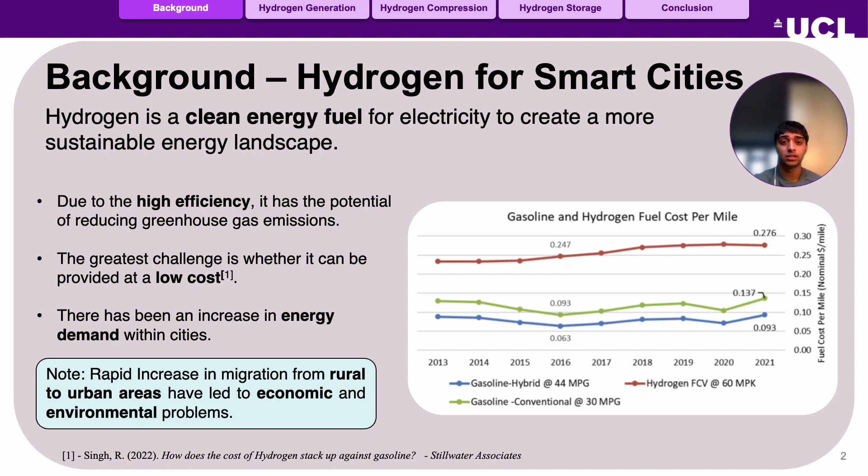When applied to highway vehicles, hydrogen can lead to a substantial reduction in emissions. Studies show that these vehicles could achieve an impressive 50 to 90% reduction compared to today's gasoline vehicles. For hydrogen to play a pivotal role in transportation and electricity creation, it must be economically competitive compared to other fuel sources. Currently, this translates to a benchmark of being priced at least $4 per gallon of gasoline.

Our presentation delves deep into hydrogen generation, compression, and high-density storage, shedding light on the pivotal factors that drive the development and integration of hydrogen as a viable energy solution. Hydrogen, with its various production methods, poses unique challenges such as those encountered in steam methane reforming. Following production, the next critical step involves compression for efficient storage and transportation. It is through the compression process that hydrogen becomes economically feasible for transportation and storage.

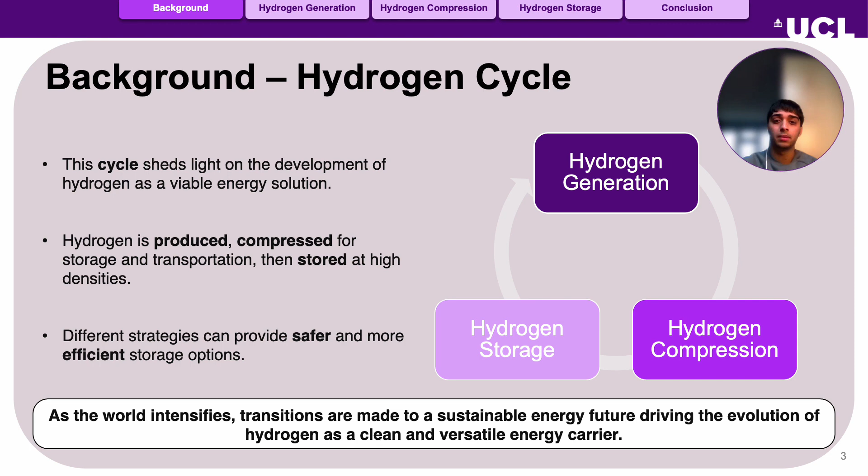Moreover, we explore the crucial aspect of storing hydrogen at high densities, maximizing its energy density and ensuring practical applications in various sectors. Different strategies are being developed to provide a safer and more efficient storage option, addressing concerns and enhancing the overall viability of hydrogen as an energy carrier.

The very first process is steam methane reforming. In this method, methane from natural gas undergoes a reaction under the influence of steam at 3 to 25 bar pressure, and with the aid of a catalyst, a synthetic fuel is created. This fuel is a mix of carbon monoxide, carbon dioxide, and hydrogen. This reaction is endothermic, requiring the input of heat, as seen in the equation on the left.

The process is crucial for hydrogen generation, yielding the highest purity form of hydrogen. The purity makes it not only cost-effective but also versatile for use in industrial processes and fuel cells. There's also another method called partial oxidation, where methane reacts with oxygen as seen in the equation on the right. In this exothermic reaction, carbon monoxide is produced, releasing heat. While the process is faster than steam reforming, it falls short in generating sufficient hydrogen for our needs.

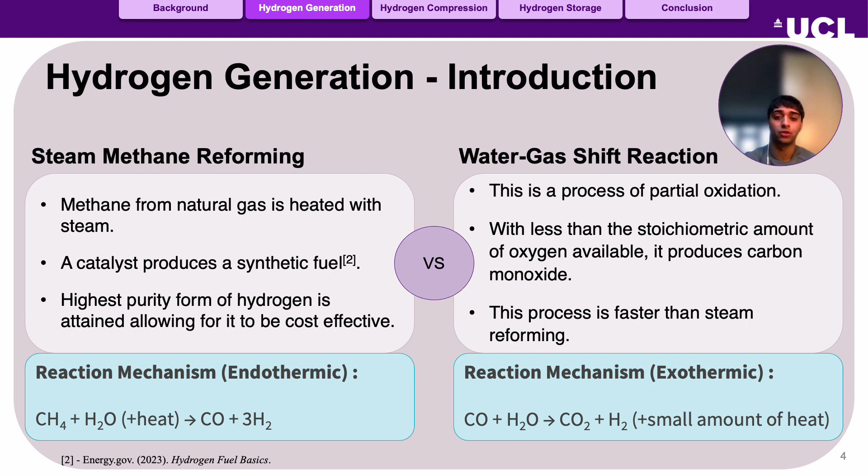To further refine the hydrogen output and eliminate carbon monoxide, we employ the water-gas shift reaction. This transformative process yields carbon dioxide and additional hydrogen. As we progress into hydrogen production, a final step known as pressure swing adsorption is used. This focuses on the purification of hydrogen by removing carbon dioxide and other impurities using a gas stream. The result is pure hydrogen. This causes carbon dioxide and impurities to adhere to an adsorbent bed, allowing everything else to pass through. The success of this purification relies on precise control of temperature and pressure.

While hydrogen in itself is an emission-free fuel, it's important to acknowledge that the feedstock used in its production is derived from natural gas, contributing to greenhouse gas emissions. Feedstock refers to the raw materials fed into a process for conversion. The escalating prices of oil, coupled with anticipated shortages, have further underscored the importance of natural gas in this context. Moreover, burning natural gas exhibits lower carbon emissions compared to other fossil fuels. Notably, it isn't subject to the constraints of weather conditions or seasons, setting it apart from some conventional energy sources.

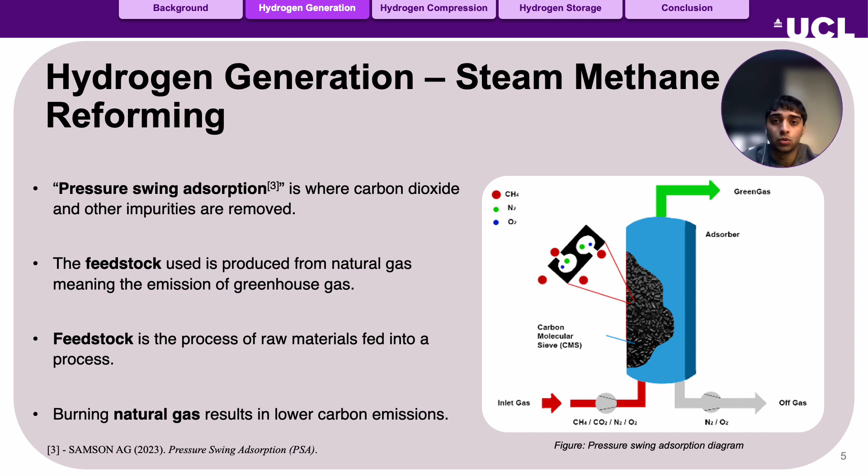Let's delve into the concept of energy centers, a strategic approach that holds immense potential for transforming urban energy landscapes. The establishment of steam methane reforming facilities within or in close proximity to urban centers presents several key advantages. The first one being SMR facilities. By situating SMR facilities near urban centers, we reduce the need for extensive energy transportation, minimizing losses and enhancing overall efficiency. The next factor is grid support.

Hydrogen generated through SMR can integrate into existing natural gas pipelines, offering a versatile pathway for energy storage and grid support during peak demand. SMR-produced hydrogen emerges as a crucial transition fuel, aiding urban areas in reducing reliance on fossil fuels and mitigating overall carbon emissions. It can also synergize with power-to-gas technologies, enabling excess renewable energy to be converted into hydrogen for later use, promoting sustainability.

Finally, government support and regulations play a crucial role in driving the transition to hydrogen-based urban energy systems. Governments can play a proactive role by offering financial incentives and regulatory support, fostering the development of SMR facilities and widespread adoption of hydrogen technologies in urban areas.

Enforcing emission standards helps get cleaner energy sources, making SMR with carbon capture more attractive and aligning with sustainability goals. In summary, the integration of steam methane reforming coupled with carbon capture and storage technologies holds the promise of establishing vibrant urban energy centers. These centers not only address the energy needs of densely populated areas, but also contribute significantly to a more sustainable and low carbon energy future. However, the success of this hinges on the consideration of environmental, economic and social factors, necessitating collaboration with diverse stakeholders.

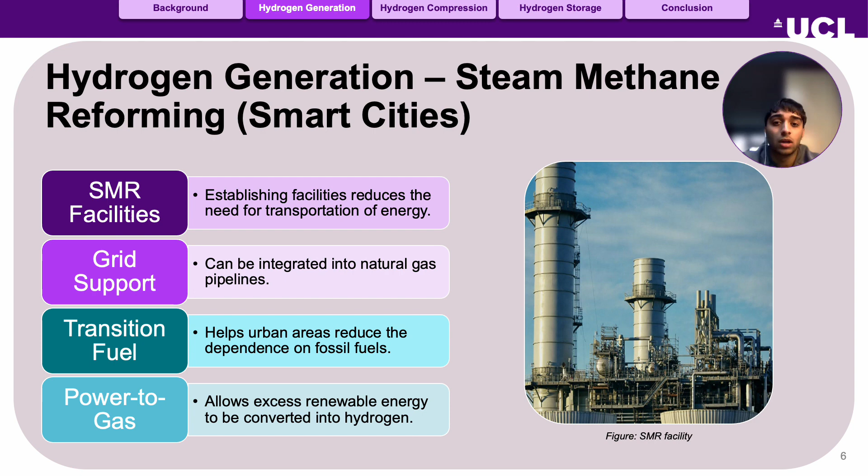Electrolysis stands as a cornerstone in the clean energy paradigm, utilizing electrical energy to drive the chemical separation of water into its elemental components. Let us unravel the well-known principle behind water electrolysis, a process fundamental to the production of oxygen and hydrogen gas. The heart of an electrolysis unit is an electrochemical cell, seen here, where water is decomposed into hydrogen and oxygen gases. The process involves two electrodes connected to an external power supply, initiating the production of hydrogen at the cathode and oxygen at the anode. The transformative journey begins when a specific voltage is applied across these electrodes.

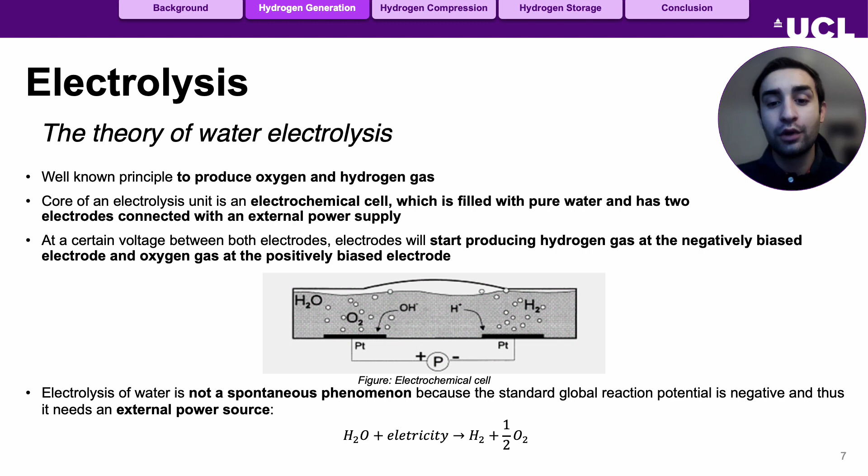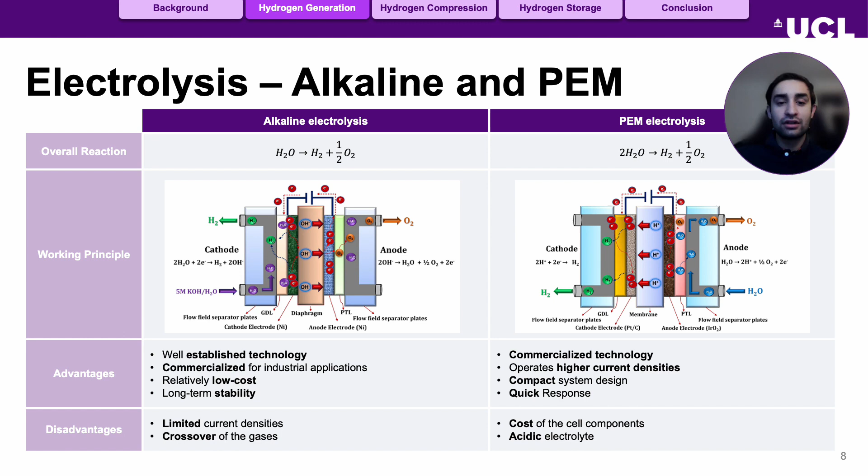Despite higher costs and shorter lifetimes, PEM electrolyzers are prized for swift responses to varying power inputs, operating efficiently at higher current densities, and delivering high-purity hydrogen, making them valuable in precision-demanding applications. The key distinction lies in the ions diffusing between the anode and cathode sides. Alkaline electrolysis involves hydroxyl ions, while PEM electrolysis involves protons, H+ ions.

The pivotal factor in achieving emission-free hydrogen lies in the energy source, emphasizing the imperative shift to renewables. The cost dynamics of renewable energy further underscore this transition, with solar and wind emerging as the cost-effective options, promoting a future of greater affordability. Various projects exemplify the seamless integration of electrolysis with diverse renewable sources, showcasing the adaptability and advancing the vision of clean hydrogen production. For example, the Wind-to-Hydrogen project in the US uses wind turbines to power electrolyzers, producing green hydrogen. In Germany, the Solar Wasserstoff Bayern project integrates photovoltaic panels for solar-powered electrolysis.

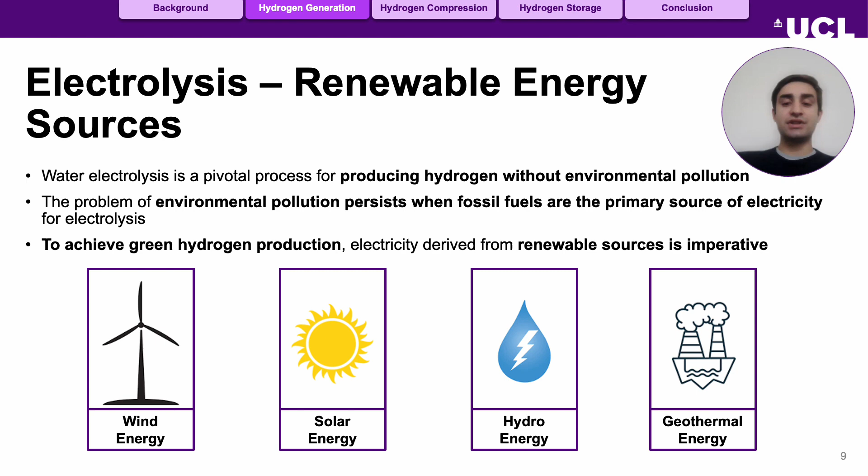Hydropower linked electrolysis diverts excess energy from hydropower plants to produce hydrogen, highlighting adaptability to intermittent sources. Geothermal power electrolysis, demonstrated by researchers, offers efficiency and cost effectiveness. Hybrid approaches like the Sotavento wind farm in Spain integrate alkaline electrolysis with wind energy, emphasizing versatility. These examples collectively underscore electrolysis as a key player in synergizing with diverse renewables for sustainable hydrogen production. The Solar Wasserstoff Bayern project, for instance, demonstrates the integration of photovoltaic panels, water electrolysis, and hydrogen storage in fuel cells, showcasing the practicality of green hydrogen in comprehensive solar hydrogen power systems.

Driven by a commitment to a zero-emission future, green hydrogen production fueled by renewable energy emerges as a tangible solution for smart cities. Its significance is undeniable in the broader energy transition, addressing climate change challenges with zero greenhouse gas emissions. As global initiatives including the European Green Deal prioritize clean hydrogen, the installation of electrolyzers powered by renewable energy is set to increase, meeting the rising demand for renewable hydrogen in transportation, heating, power generation, and industry.

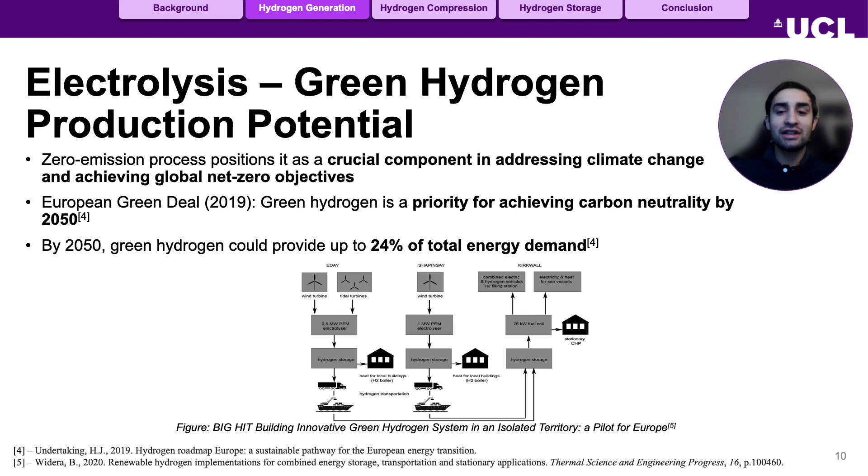Looking ahead to 2030, the goal is to scale up renewable hydrogen production to 40 gigawatts of capacity, aligning with the evolving needs of smart cities. Green hydrogen, with its potential to reshape the energy landscape, is poised to play a pivotal role in achieving a sustainable, decarbonized future for smart cities worldwide.

Biomass, derived from diverse organic sources, plays a pivotal role in sustainable energy applications. Agriculture biomass, encompassing crop residues like corn stalks, provides energy without competing with food production. Lignocellulose biomass emphasizes sustainable forest resource utilization, including wood and plant matter.

Dedicated energy crops, such as switchgrass, contribute to the biomass production, while algae biomass, derived from microorganisms like microalgae, holds promise for biofuel and hydrogen production. In the context of hydrogen production, biomass serves as a substrate in various biological processes. Dark fermentation, driven by anaerobic bacteria on carbohydrate-rich substrates, operates independently of light.

The integration of dark and photofermentation enables continuous hydrogen production, with algae like Chlamydomonas reinhardtii utilizing direct biophotolysis to convert solar energy into hydrogen. Cyanobacteria, in indirect biophotolysis, enhance hydrogen production through mutant strains and CO2 fixation.

Photofermentation by purple non-sulfur bacteria overcomes oxygen inhibition, although challenges include limited organic acid availability. Biocatalyzed electrolysis presents an alternative, oxidizing acetate or dark fermentation effluent to produce hydrogen with electrical energy input. This multifaceted use of biomass contributes to a more sustainable and circular economy.

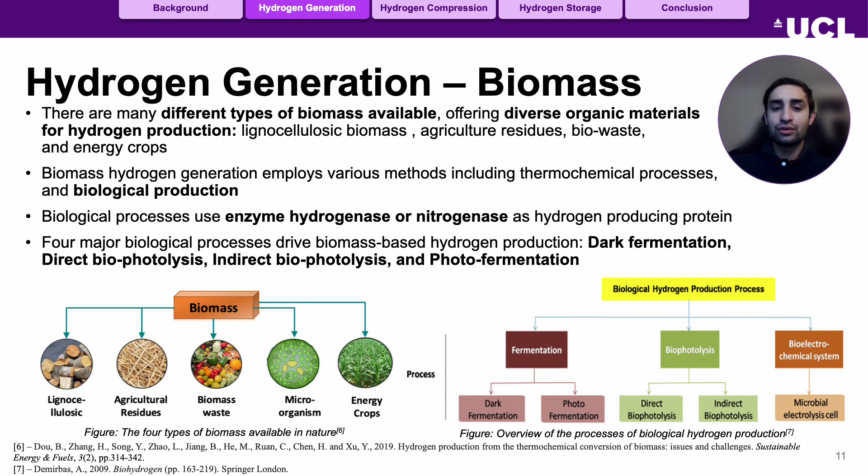One of the foremost advantages of biomass-based hydrogen production lies in its renewable nature. Algae and biomass-derived substrates are abundant and can be sustainably sourced, providing a continuous and eco-friendly feedstock for hydrogen generation. Unlike fossil fuels, biomass is not finite and can be cultivated, mitigating concerns related to resource depletion. This renewable aspect aligns with broader efforts to transition towards sustainable energy sources.

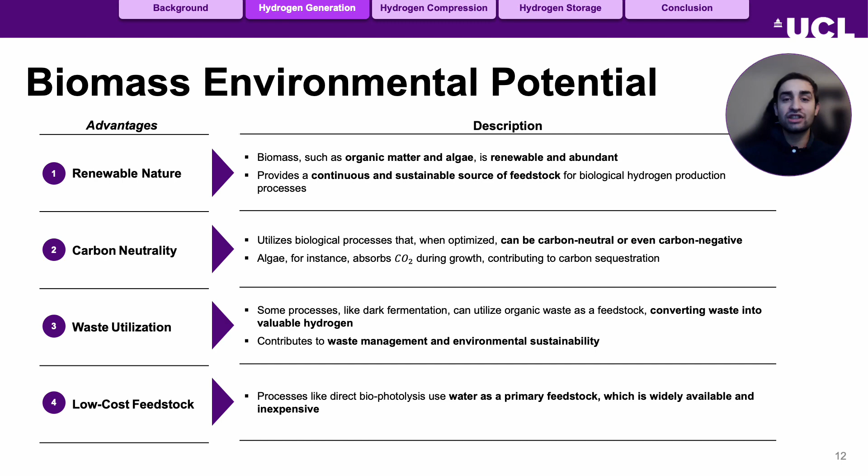Furthermore, utilization of biomass, including waste materials, contributes to effective waste management. Biomass-based hydrogen production not only taps into renewable resources but also addresses environmental concerns by repurposing organic matter. The potential for carbon neutrality is another significant advantage, as biomass processes, when managed responsibly, can be designed to balance carbon emissions, minimizing the overall environmental impact. In essence, biomass-based hydrogen production stands as a promising and sustainable pathway, intertwining renewable resource utilization with environmentally conscious energy practices.

Transitioning from the generation of hydrogen, we move on to the crucial step of hydrogen compression. Hydrogen, in its gaseous form, has a low energy density, meaning it occupies a large volume compared to its energy content. This is where compression steps in. It's a crucial process that reduces the volume of hydrogen, making it practical for storage, transportation, and utilization. Hydrogen compression is the bridge between production and application and allows us to store and transport hydrogen efficiently, overcoming the limitation associated with its low density.

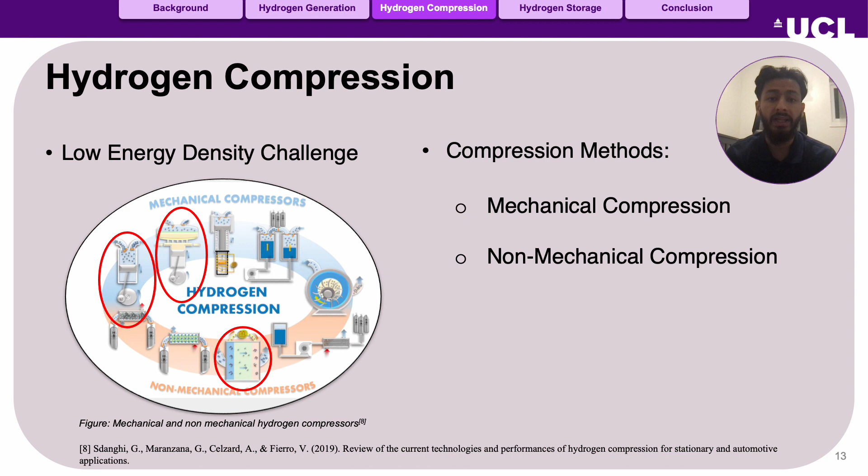Now, the compression methods can be split into two categories: mechanical and non-mechanical compression. Our focus will be directed towards exploring these compression methods with a more detailed examination of piston compressors, diaphragm compressors, and electrochemical compressors, which are highlighted in the image.

Mechanical compressors operate through mechanical movements and rotating elements to compress gases. In reciprocating compressors, a piston cylinder engagement creates a vacuum during backward movement and compresses gas during forward movement. Examples include piston and diaphragm compressors. Rotary screw compressors use intermeshing helical screws to gradually compress gas, while centrifugal compressors employ a rotating impeller to accelerate and pressurize gas.

Non-mechanical compressors, on the other hand, like electrochemical, hydride, and cryogenic compressors, don't rely on traditional mechanical components. Electrochemical compressors use electrochemical reactions. Hydride compressors utilize metal hydrides for absorption and desorption, and cryogenic compressors achieve compression through cooling and liquefaction. Each type suits different applications based on factors like pressure requirements, efficiency, and environmental considerations.

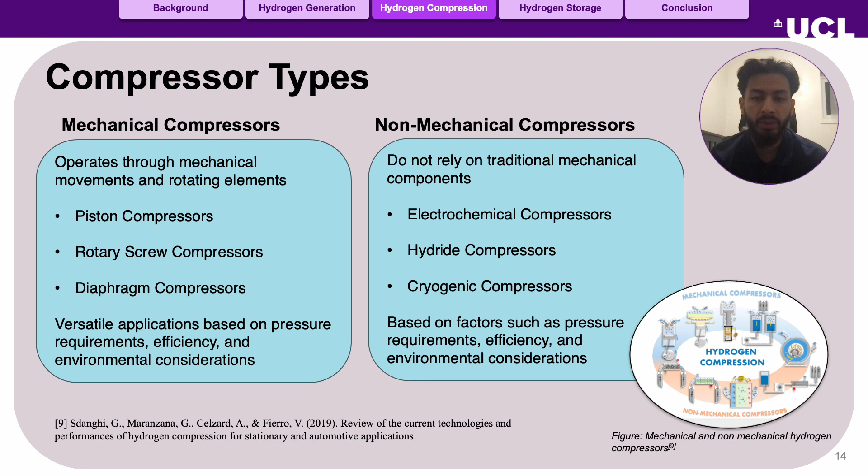Reciprocating piston compressors, especially the oil-free type, are widely employed in hydrogen applications for pressures exceeding 3 megapascals. These compressors are suitable for moderate flow and high pressure scenarios, with power consumptions up to 11.2 megawatts and hydrogen flow rates reaching 890 kilograms per hour at a discharge pressure of 25 megapascals.

The basic design involves a piston cylinder system with intake and delivery valves, converting rotary motion to reciprocating motion. Gas intake occurs as the piston moves towards the bottom dead center, followed by compression and discharge when reaching the desired pressure. Multi-stage configurations achieve higher pressures, commonly used in on-site hydrogen refueling stations. Despite challenges like embrittlement and efficiency limitations for high flow rates, ongoing developments including non-metallic materials and continuous monitoring systems aim to enhance the performance and reliability of these compressors in hydrogen applications.

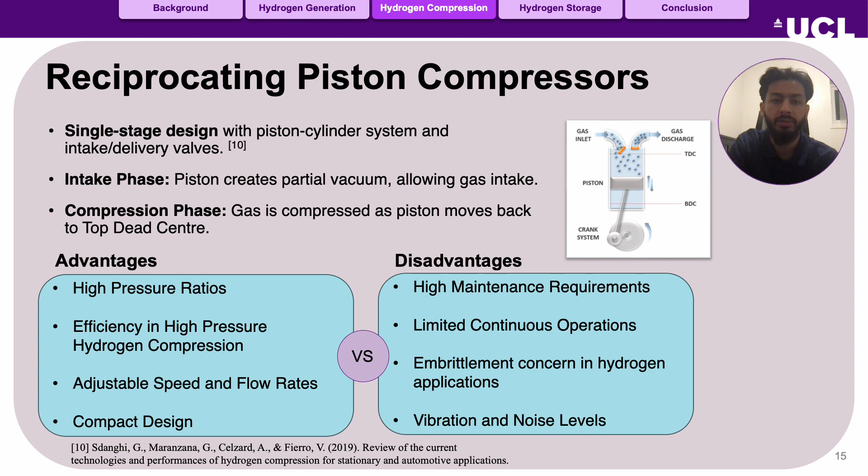A diaphragm compressor operates by utilizing a flexible metal membrane known as the diaphragm to isolate the gas from the mechanical components of the compressor. This three-part diaphragm includes a process plate on the gas side, a hydraulic plate on the oil side, and a middle plate for leak detection and prevention of diaphragm failure. Hydraulic fluid, often oil, is employed to transmit motion from the mechanical components to the diaphragm, controlling its movement.

The compression process involves the diaphragm reducing the volume in the cavity space, leading to an increase in gas pressure. Oil pressure control is crucial post-gas discharge to prevent excessive pressure differentials. Material selection for the diaphragm is critical to ensure corrosion resistance and durability. The closed-loop hydrogen circuit minimizes leakages, maintaining high gas purity. Despite challenges like mechanical stresses, flow rates, and durability, ongoing efforts focus on optimizing diaphragm design for enhanced efficiency and reliability in compressing gases, particularly in hydrogen applications.

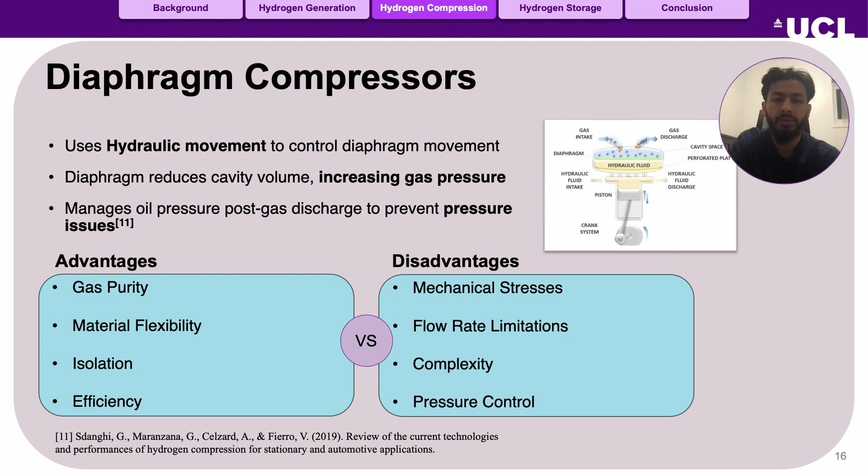Electrochemical hydrogen compressors are innovative devices with high recovery ratios of up to 95%. Operating like proton exchange membrane fuel cells, they split low-pressure hydrogen into protons and electrons at the anode. Protons move through a solid polymer electrolyte, while electrons flow through an external circuit. At the cathode, electrons and protons recombine, increasing pressure.

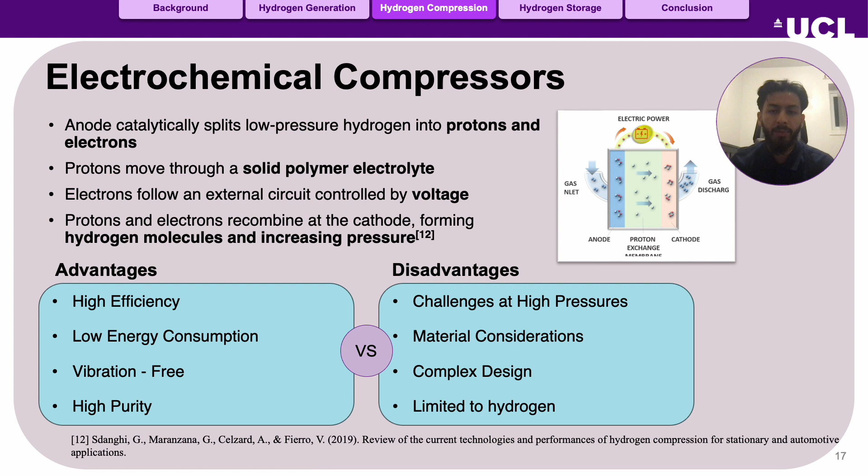Challenges arise at high pressures due to hydrogen permeation, but multi-stack configurations enable pressures of up to 100 megapascals. Electrochemical compressors offer advantages like low energy consumption and vibration-free operation, finding use in hybrid systems and applications requiring high-purity hydrogen flows. From the methods discussed, electrochemical compressors stand out as a promising solution.

These devices, operating seamlessly without moving parts, offer high efficiency and vibration-free operation. The compact design and potential for distributed storage align well with the integrated storage solutions needed in urban environments. Moreover, the ability to reach high pressures of up to 100 megapascals makes electrochemical compressors suitable for diverse applications within smart cities.

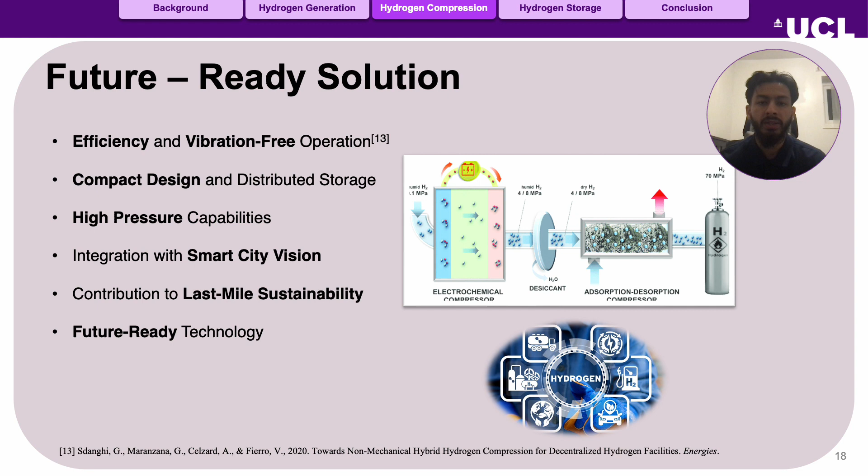Looking towards the future, the integration of electrochemical compressors into urban landscapes aligns well with the smart city vision by ensuring efficient hydrogen distribution, reducing emissions in public transportation, and contributing to the sustainability of last mile services. As cities aim for resilience and sustainability, electrochemical compressors represent a forward-looking technology that supports the broader goal of realizing smart and green cities for a more environmentally conscious and technologically advanced future.

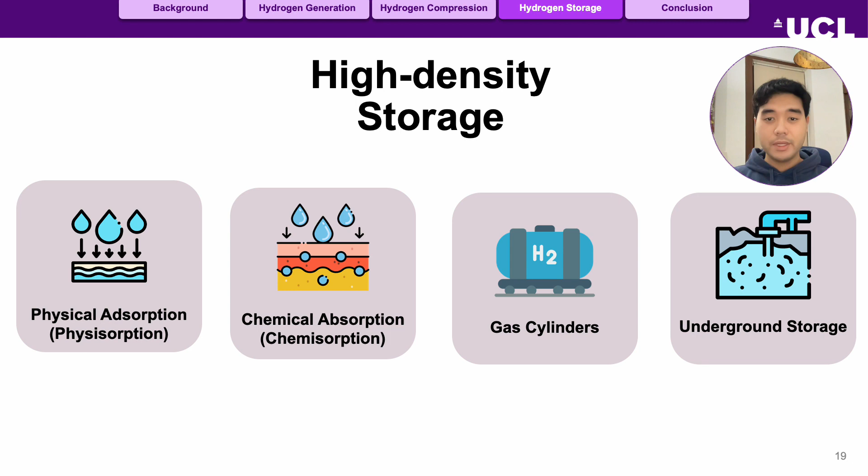Moving on to hydrogen storage, in order to achieve the implementation of hydrogen as part of smart city goals, storage is one of the key factors in making sure that hydrogen can be safely transported and stored for everyday usage and accessibility. Generally, there are 4 types of hydrogen storage: physical adsorption, chemical absorption, gas cylinders, and underground storage.

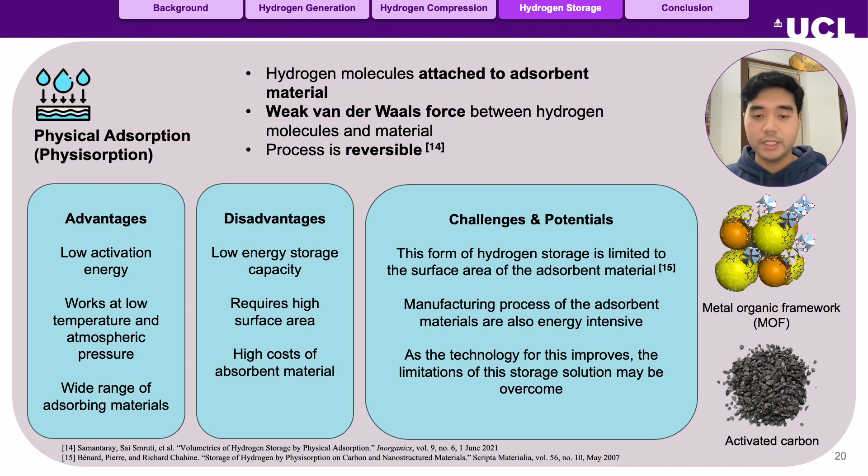One of the challenges of this method is that it requires high surface area of the material, and manufacturing could be very expensive and requires high energy. However, as the technology improves and matures, it has huge potential in providing an efficient way of storing hydrogen. This could also help in distributed power sources and decentralizing power grids for a particular city.

Next is chemical absorption of hydrogen for storage. This process of storage requires chemical bonding of hydrogen atoms into compatible materials, and there are 3 general types of chemical absorption: liquid organic hydrogen carriers or LOHC, metal hydrides, and chemical hydrides.

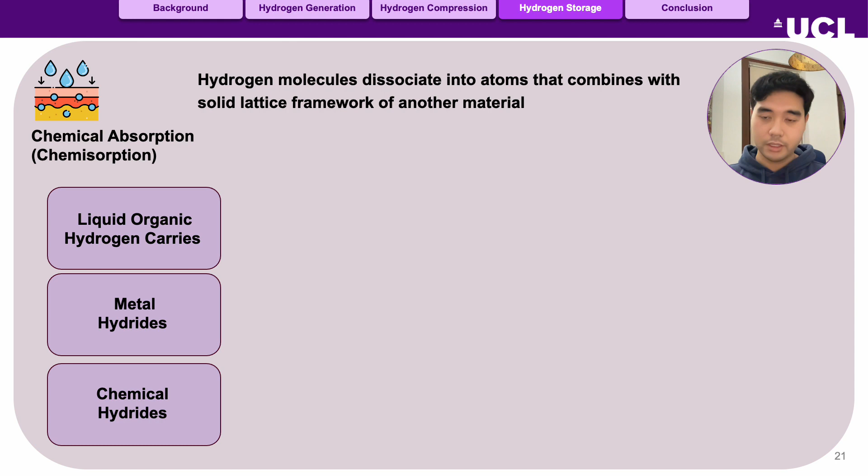Liquid organic hydrogen carriers or LOHC is a method where waste fuels from biomass are used as a medium for the hydrogen molecules to be absorbed into. The process requires catalysts to speed up the hydrogenation and dehydrogenation process. This storage method offers many benefits such as high energy storage capacity and can be stored for longer periods under ambient conditions. However, limitations such as limited catalysts and high temperature for dehydrogenation prevent it from being used widely, especially for a smart city due to safety concerns and the demanding amount of energy for operation.

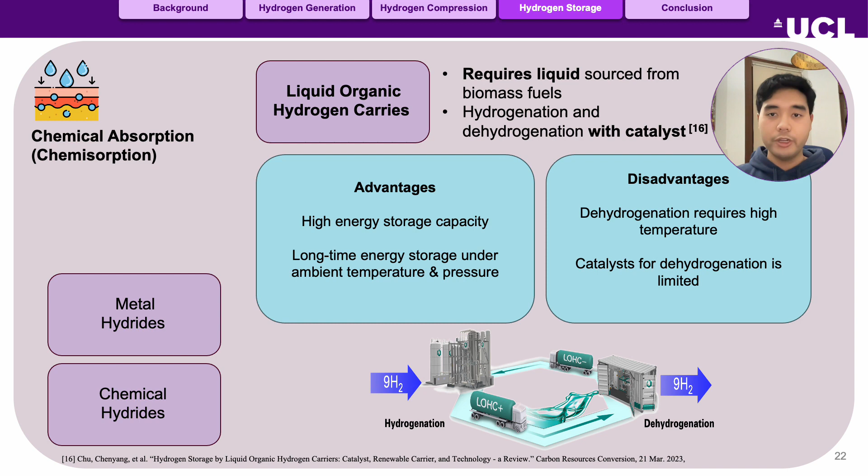Metal hydrides use metal to form hydrides between the lattice framework of the metal and hydrogen atoms. It offers high volumetric storage for hydrogen and is one of the safer options for storage. The downside is that it is less efficient during the process of hydrogenation and dehydrogenation, particularly due to its slow kinetics of absorbing and desorbing hydrogen atoms. This form of storage can be useful for static applications, particularly to power up buildings, for a smart city due to metal hydrides being heavy.

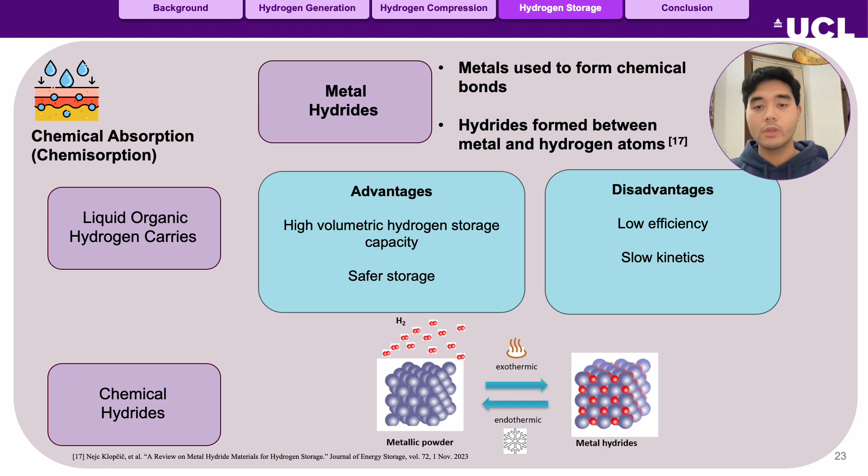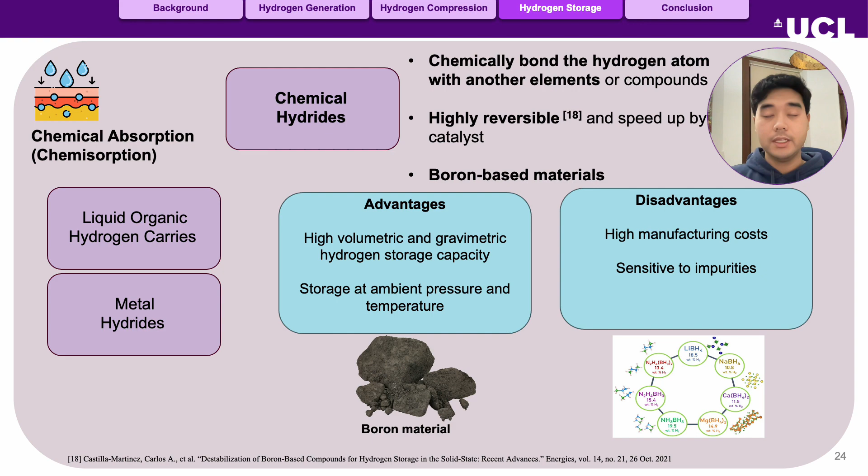Chemical hydrides use chemical elements such as boron to form chemical bonds with hydrogen atoms for it to be stored. The process is reversible and can be sped up by using catalysts. It also offers high volumetric hydrogen capacity, with some chemical hydrides able to safely store hydrogen at ambient pressure and temperature. The drawbacks of this storage are its high manufacturing costs and high sensitivity to impurities, which can reduce storage capacity and efficiency of the whole storage system.

Finally is gas cylinder. Gas cylinders are one of the most typical and established ways of storing hydrogen. The process is direct compared to the others, where hydrogen gas is compressed into a high-pressure tank for storage. There are several compressed hydrogen tanks available, consisting of Type 1, Type 2, Type 3, and Type 4. These differ by the material they are made of, and each type has a different pressure that it can withstand.

Type 1 is usually avoided due to the risk of hydrogen embrittlement. However, it is the cheapest among the others. Type 2 and Type 3, on the other hand, are similar, with the difference being the coverage of carbon fibers surrounding the metal liner, with Type 2 only covering the middle part and Type 3 fully covered from top to bottom.

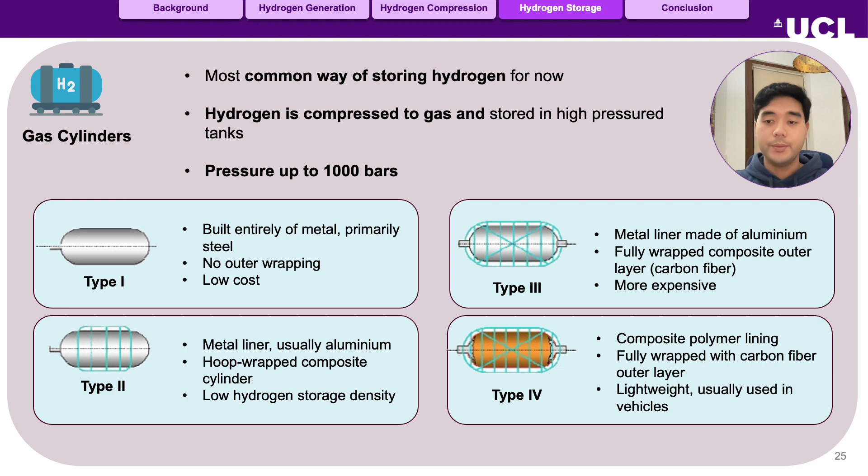Type 4 consists of a polymer liner with a full carbon fiber outer wrapping, making it the lightest among the other types of cylinders. This is suitable for transportation and can be implemented into public buses, taxis, and even private vehicles for a hydrogen smart city. Type 2 and Type 3, on the other hand, are more suited for industrial, domestic, and commercial purposes due to the weight and footprint of the cylinder.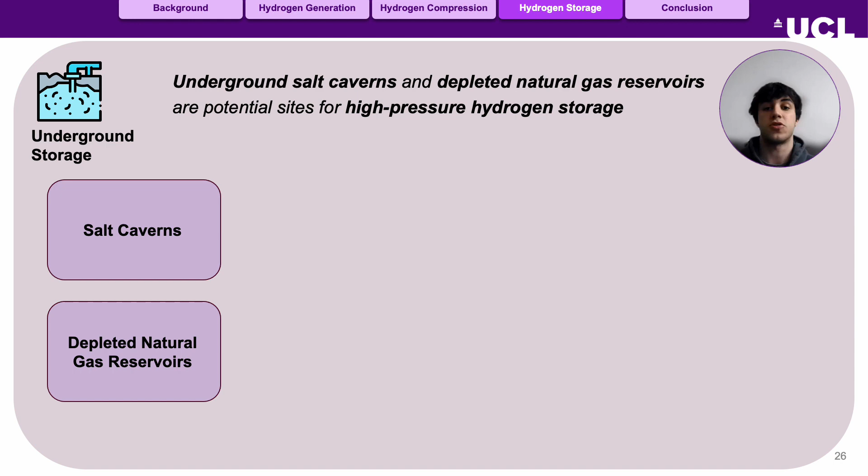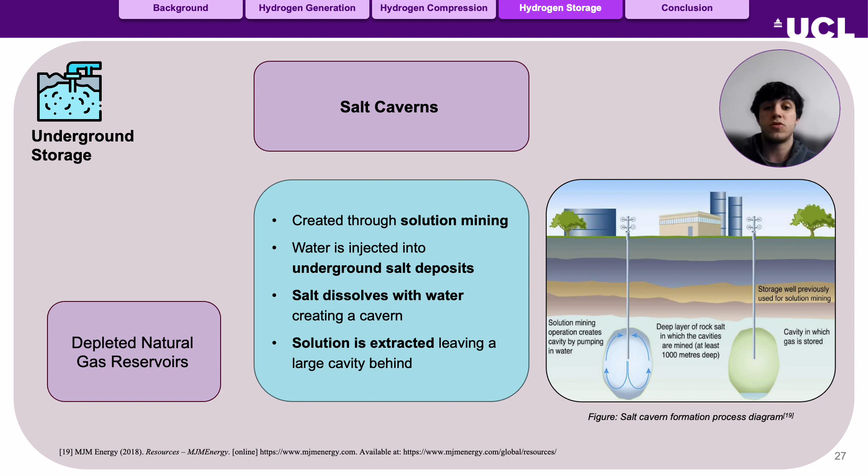Furthermore, underground storage methods such as salt caverns and depleted natural gas reservoirs have gained interest over recent years due to their capacity to store high-pressure hydrogen. So what are they and how are they formed? Well, salt caverns, as the name states, essentially are cavities within underground salt deposits. The way these are created is by solution mining. This process involves injecting water into deep underground salt deposits, usually more than 1,000 meters deep. Then, the surrounding salt dissolves in the water, and the remaining solution is extracted using pumps, resulting in the cavity being left behind, as shown in the diagram on the right.

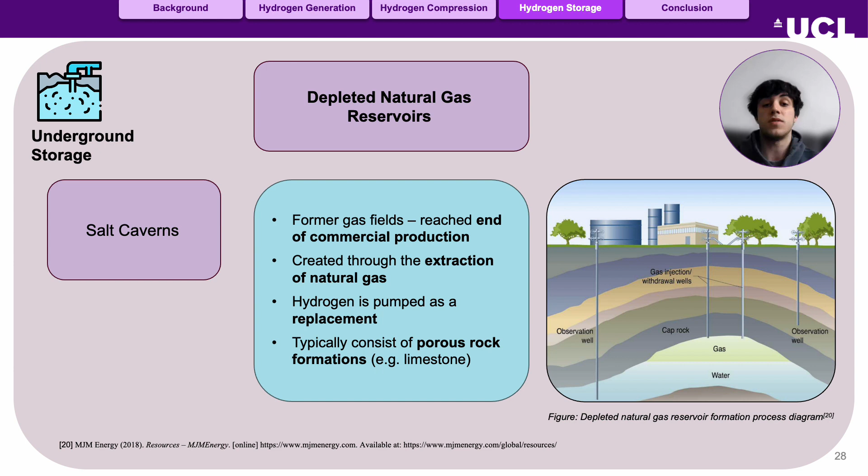Similarly, other potential underground hydrogen storage sites are depleted natural gas reservoirs. These sites are out-of-commission gas fields, typically consisting of porous rock formations. So how are they created? Well, the process is quite simple. First, the existing natural gas is extracted from the ground via withdrawal wells. Then, the hydrogen is injected via injection wells as a replacement, and its operational integrity is then measured using observation wells throughout the lifespan of the reservoir.

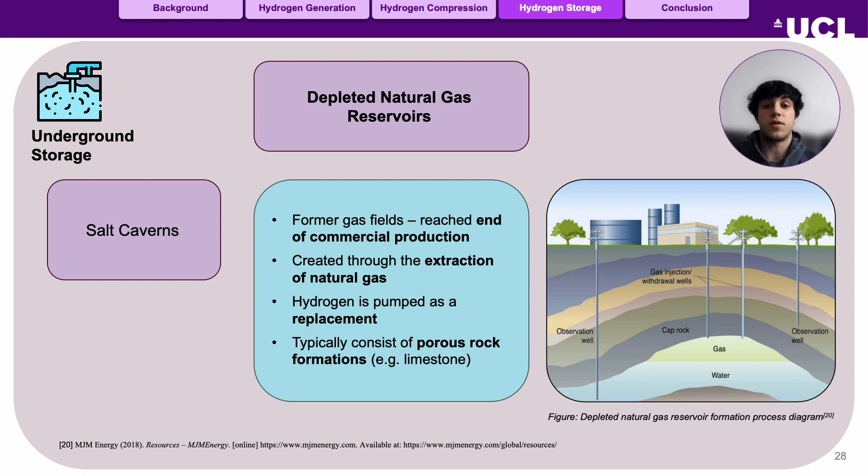So, why are these sites potential sites of high-pressure hydrogen storage? Well, this is because of their key advantages in terms of safety and capacity. Due to the physicochemical properties of rock formations, these sites have great infrastructure stability, reducing the risk of subsidence, thus ensuring long-term storage safety. Additionally, the technology for creating and maintaining caverns is well established, further enhancing the safety profile of these storage solutions.

Moving on to capacity, one of the strengths of underground storage is its flexibility. Storage size can be tailored to meet specific volume requirements, providing a scalable solution. The numbers speak for themselves. Salt caverns can accommodate a substantial 2,520 tons, while natural gas reservoirs 1,000 tons. This scalability is particularly crucial in meeting the evolving and growing energy needs in the transition into smart cities.

Now, let's address some limitations. It's important to consider the geological characteristics that make a location suitable for underground storage. This, in effect, limits the long-term scalability of these storage systems in certain geographies. Furthermore, especially in natural gas reservoirs, hydrogen leakage poses a problem. This is because, unlike methane, hydrogen has a higher diffusion rate. Thus, reservoirs which were once tailored to methane storage may prove less effective for hydrogen. This, in effect, requires an additional cushion gas to ensure high pressure stability and thus increases operational costs.

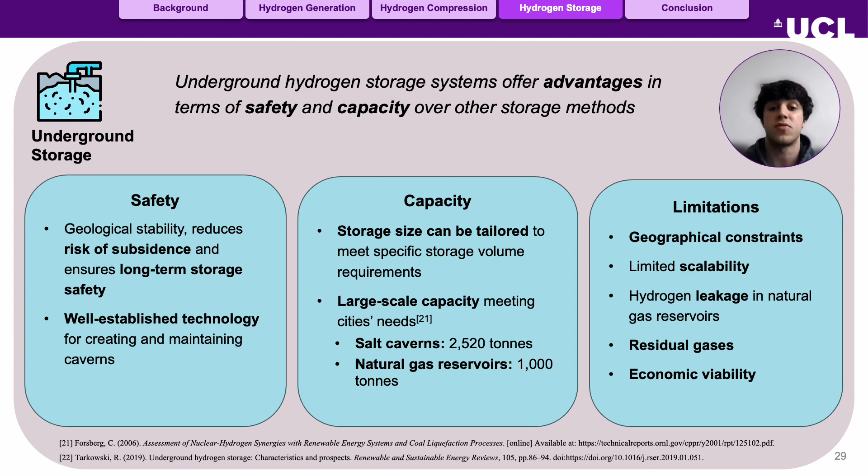Overall, underground high pressure hydrogen storage presents compelling advantages, from safety and capacity to the efficient use of infrastructure. While we navigate some limitations, especially in terms of economic feasibility, the potential benefits for smart cities are significant. As such, continued research collaboration and advancements in technology will be key to addressing challenges and ensuring the successful integration of these storage solutions in our pursuit of sustainable and resilient energy systems.

In conclusion, the use of hydrogen as an energy carrier presents a promising and versatile solution for powering smart cities, offering an alternative to traditional energy sources. Hydrogen's potential to decarbonize various sectors, enhance energy security, and contribute to the transition to a greener future cannot be overstated. As we strive to build a smarter, more sustainable urban environment, hydrogen emerges as a critical player in the energy landscape. Its ability to integrate seamlessly with existing infrastructure, coupled with advancements in generation, compression, and storage technologies, positions hydrogen as a catalyst for innovation and progress.

However, it's important to acknowledge the challenges and continue research and development efforts to improve efficiency, reduce costs, and address safety concerns associated with hydrogen utilization. Collaborative efforts between industries, governments, and research institutions will be instrumental in realizing the full potential of hydrogen in shaping the energy landscape for smart cities. As we envision a future powered by clean and sustainable energy, hydrogen stands at the forefront, ready to play a pivotal role in the evolution of smart cities.

Let us embrace the opportunities that hydrogen presents, working together to create a more resilient, efficient, and environmentally conscious urban environment. The journey towards a hydrogen-based future is an exciting one, and it's up to us to pave the way for a brighter, more sustainable tomorrow.